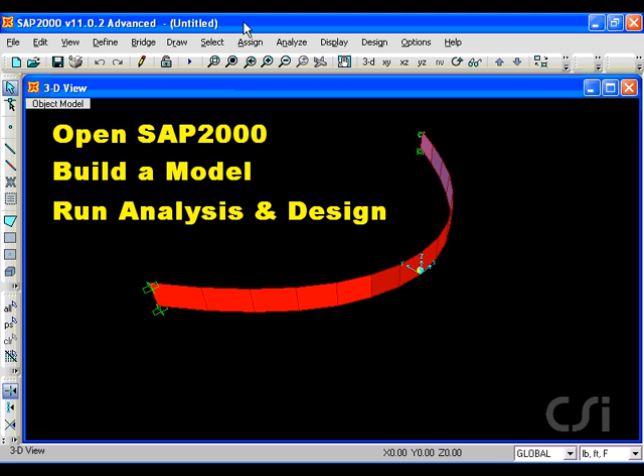This tutorial will show how to use the SAP 2000 Application Programming Interface, or API functions, to start SAP 2000, build a model, and run an analysis from an external application. In this case, we will use Excel in its Visual Basic for Applications language, or VBA, although almost any programming language can be used to access the SAP 2000 API functions. The SAP 2000 API license is available for all versions of the program.

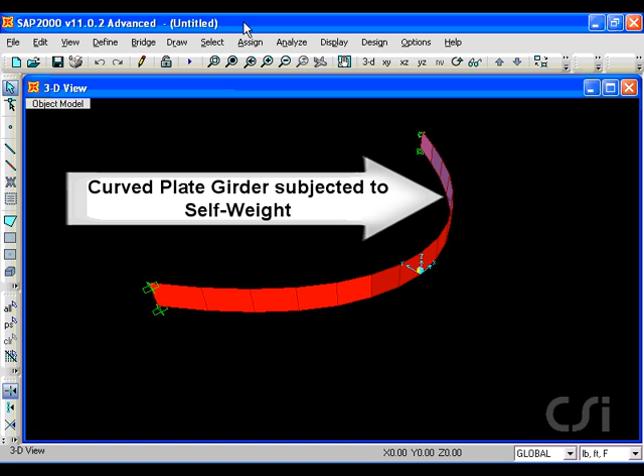Our model for this tutorial will be a curved plate girder with fixed ends subjected to self-weight. Included with the SAP 2000 API license is documentation that describes all of the functions in detail. Chapters include an introduction, getting started, API functions, example code, an alphabetized list. For each function, detailed information on the syntax, the Visual Basic procedure, and the parameters is provided, along with remarks and sample code using VBA.

We will control SAP 2000 from Excel using VBA. We will also define the geometry for the model using Excel. We start by defining a column for the x-coordinates of the girder. Next, we define a column for the y-coordinates. Lastly, we will define a column for the vertical displacements along the bottom of the girder, which will be extracted from the SAP 2000 analysis and written into Excel.

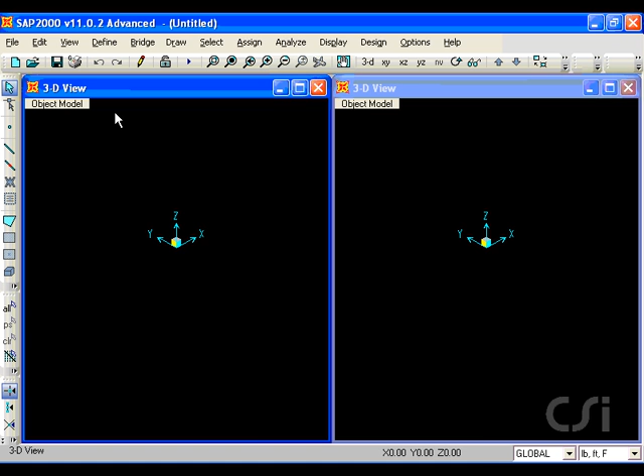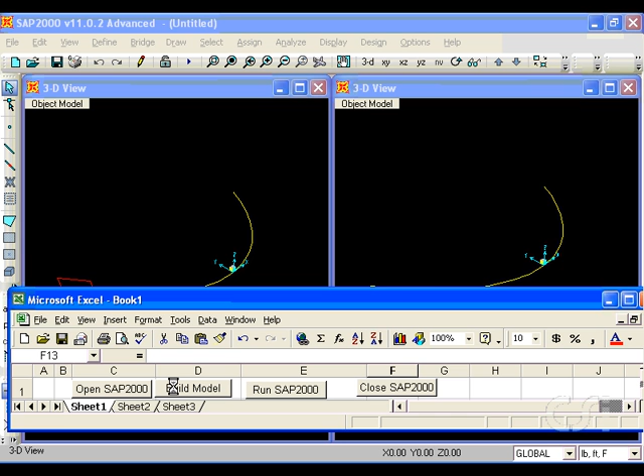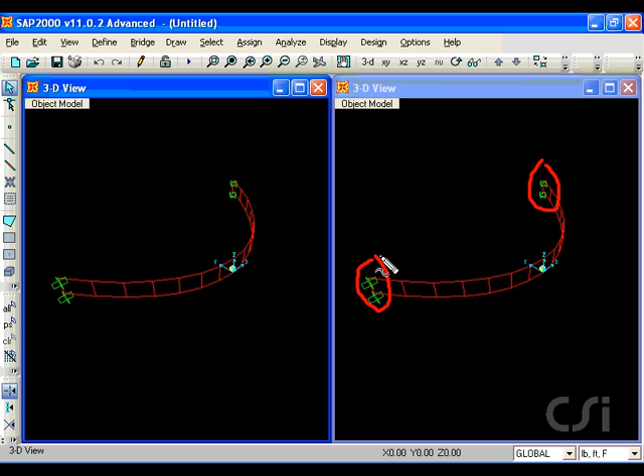With SAP 2000 now running, we return to Excel and click the Build Model button. First, the frame objects are created along the curved geometry and then extruded into the area objects that form the girder. Note that the joint restraints have been added at the ends. Also, the file is still untitled, as it will not be saved until we run the analysis procedure. We are now ready to run the analysis. Note that the vertical displacement column is blank. These cells will be filled in after the analysis.

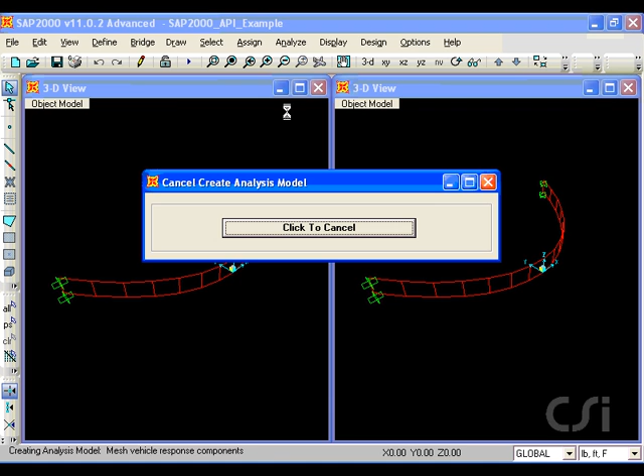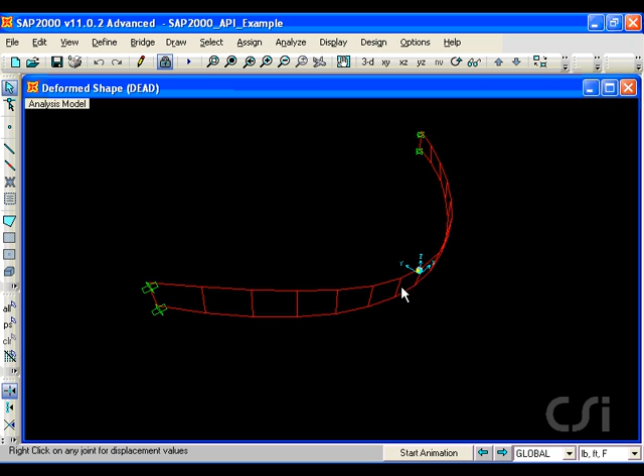With the analysis complete, note that the file has now been named and saved. The vertical displacement at the origin is minus 0.1573. Remember this number for comparison on the worksheet. The displacement values are now displayed on the worksheet. The value at the origin matches that shown in SAP 2000.

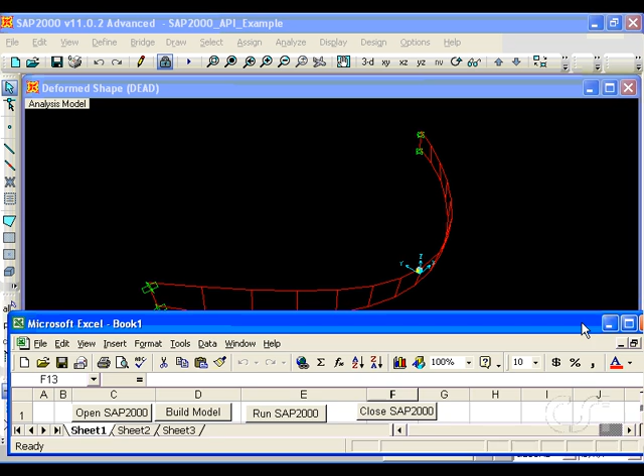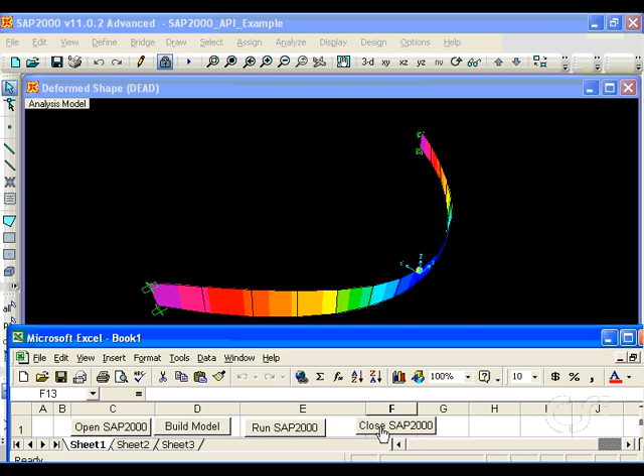Even though SAP 2000 was activated from an external application using the API functions, all the SAP 2000 menu commands are still available, and here we ask for displacement contours to be displayed. With the analysis complete and the desired results extracted back into Excel, the last step is to close the SAP 2000 program.

In summary, SAP 2000's API functions provide a convenient way to link SAP 2000's powerful analysis, design, and graphic capabilities to other applications. Although this example used Excel and its VBA language, most major programming languages can be used to access these API commands. This concludes this tutorial.